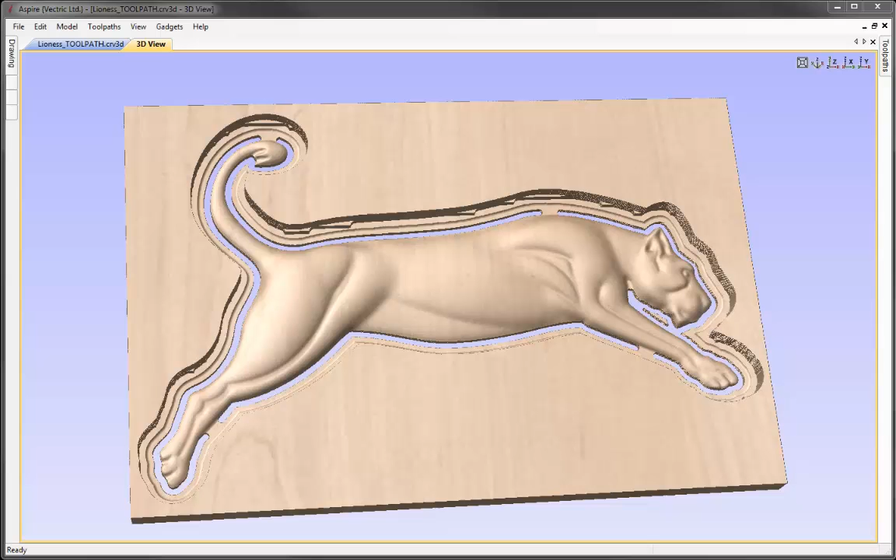Let's open a copy of the software. So let's click on the icon to open an existing file, and from the project folder I'm going to select the file lioness_model.crv3d and hit open. Now there we can see the 2D view. I'd like to see the 3D view as well, so I'm just going to click on the icon here to tile the windows so that the 2D view is on the left and the 3D view is on the right.

And before we go over and start calculating the toolpaths to machine this, I should check the size is the correct dimensions for the part that I actually want to cut. Let's come down and click on the modelling tab, and I'm going to select the component that we're going to cut here. And if we come up and click on the icon to set selected object size, then that's going to show me its width and height, and if I wanted to I could adjust these now. I'm happy with the values that we've got there, so I can hit close.

Next I want to check the height of the model in Z, so I can come up and click on the icon here to scale Z height of model. This is going to show me its current height here, and if I want I can adjust this either using the slider, a percentage value, or I can click on the button to set exact height. Now I'm planning to cut this out of a 1/2 inch block of material, so I want to make sure that it's somewhat smaller than that to allow a little bit of space above the model, and also to allow a little bit of stock on the back of the part as well to make sure it's thick enough.

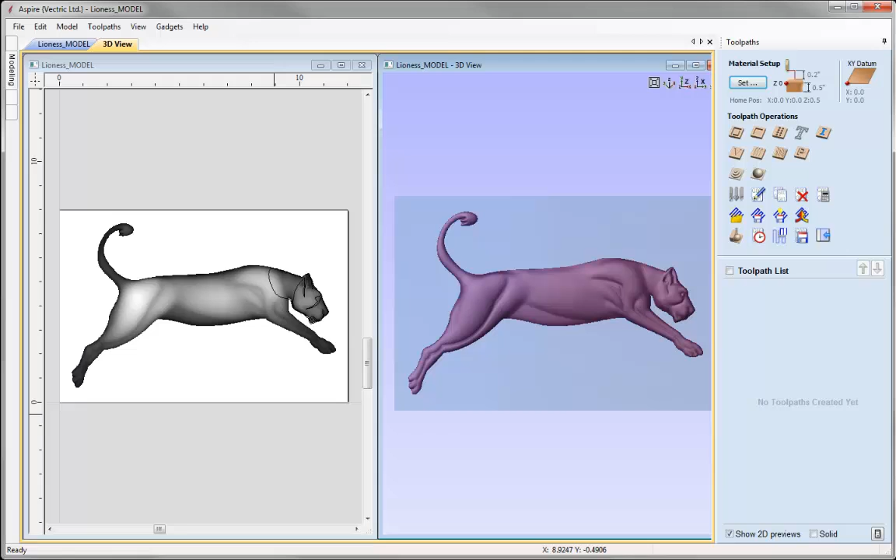Then we'll do what we call a raster roughing, which will take us much closer to the finished surface, and that will allow us to have much less loading on the finishing tool, and so hopefully run that a little bit quicker. It's not essential to do this 2-stage process, but it can be quite a useful technique for certain fairly low-relief sort of organic models like the one we've got here.

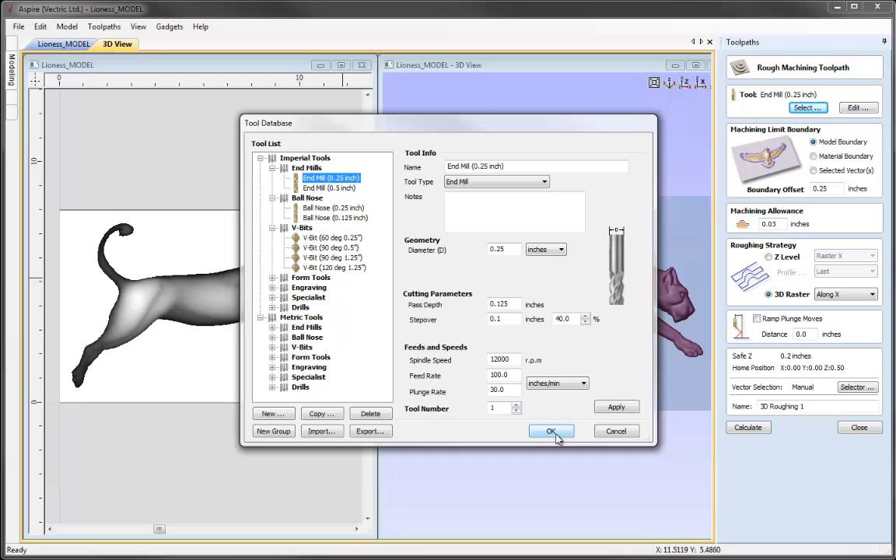So we'll come up and click on the icon for the 3D roughing toolpath, and in here I want to select a 1/4 inch end mill in this case, so we'll choose that tool there, 0.25 inch end mill. I'm just going to take the default settings for this and hit OK.

In this case we want to use the model boundary, so that's just going to pick up the visible model from the 3D view and use a boundary around that 3D object there, so I don't need to have any vector selected when I choose that option.

And I want to come past the edge of that boundary to make sure the tool clears material right the way down to the modelling plane, so that we've got a nice clean edge that we can come in and cut out around. So in this case we'll use quite a large boundary offset. We'll go 0.25 of an inch, so that means it's just going to extend the toolpath 1/4 of an inch past the edge of the model.

The machining allowance for the roughing allows us to add a sort of an imaginary 3D thickness on our model. What that's going to do is keep the roughing tool a little bit away from the finished surface. That ensures we've got some material to cut with the finishing tool, but also minimises the chance of the roughing tool creating some tear out or chipping our finished surface.

As I say, for the first roughing strategy I want to use Z-level roughing in this case, so that's effectively 2D machining around the 3D object. And I'm just going to come down and we'll call this toolpath 3D roughing Z-level and hit calculate.

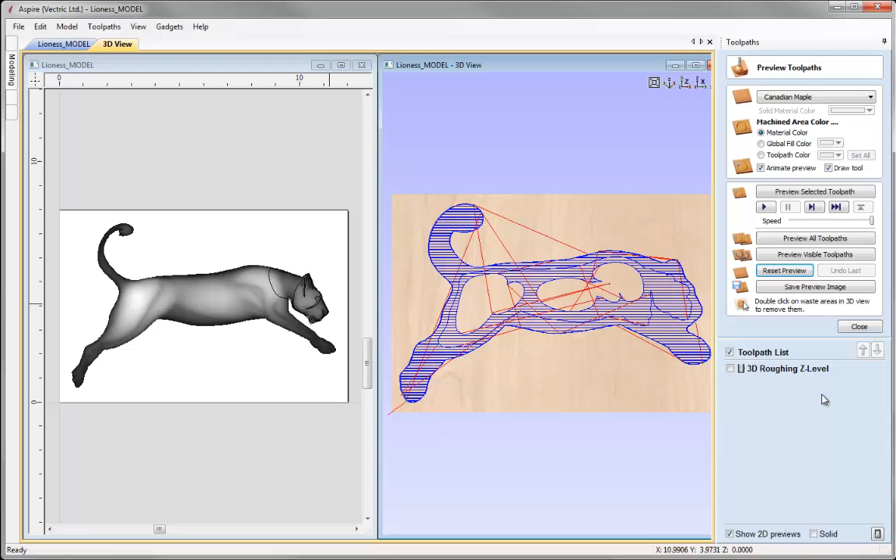Now we can see the software's automatically opened the preview toolpaths form here. We can just click and rotate this and you can see we've got a couple of two-dimensional toolpaths cutting around the 3D object there. So let's take a look at those in the preview. We'll click on preview selected toolpath. There's the tool just machining out around there. Maybe we'll just zoom in a little and you can see how that's cutting these 2D surfaces.

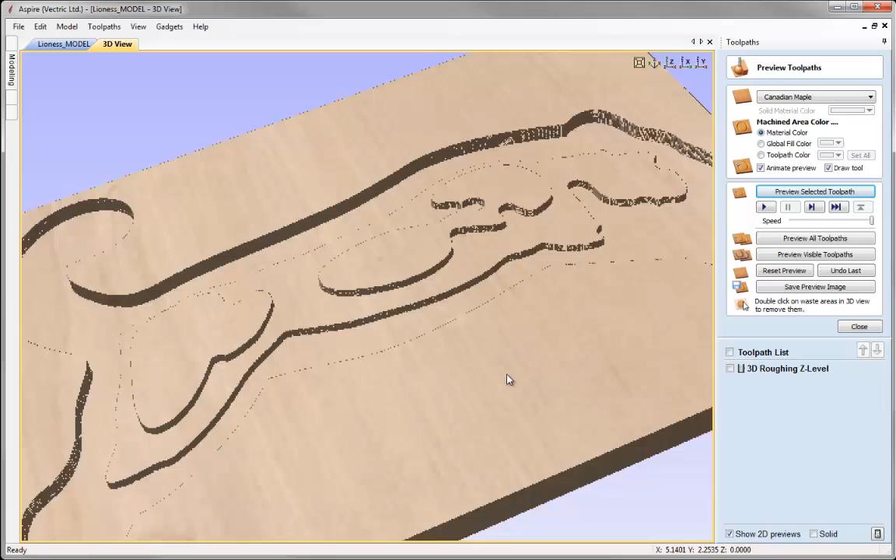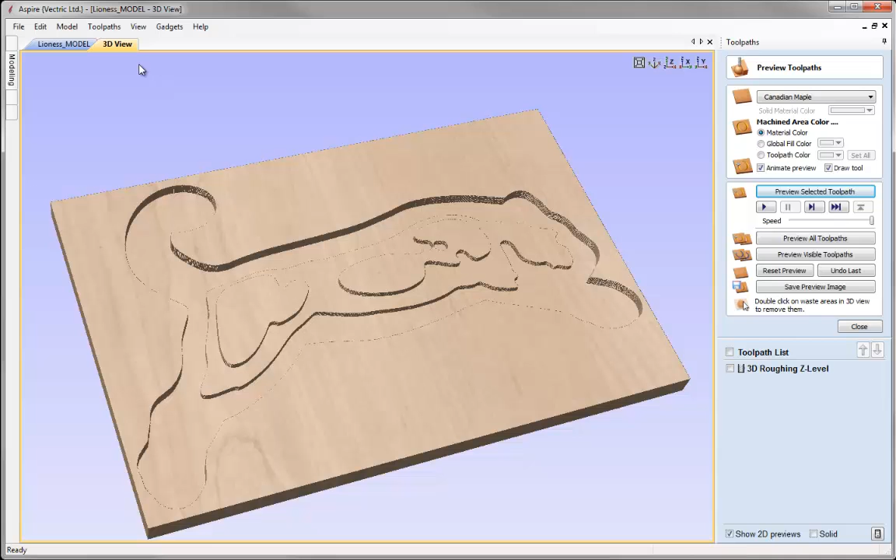Now in a lot of cases and for a lot of material that's fine and we could now proceed on to the finishing toolpath, but in some cases we'd like to get a little bit closer to the finished surface, and that's where it may benefit us to use a second roughing toolpath using the raster option. So let's just return this so that we've got the split screen. We'll go to View, Tile Windows Vertical again. Let's close the preview toolpaths form and let's go back up to the roughing toolpath again.

I'm going to use the same tool this time, but I do want to change the parameters a little. The way the raster works, it'll create a 3D toolpath over the part, but it will recut the same areas if the pass depth on the tool is shallower than the model. In this case, because we've already used the Z-level roughing to clear it out, I can do it effectively in a single pass. So if we click on edit here, for the purposes of this toolpath only, I'm going to override the pass depth of the tool. I'm going to set it much deeper than I would normally for a tool like this, and we'll set it to 1/2 inch and hit OK.

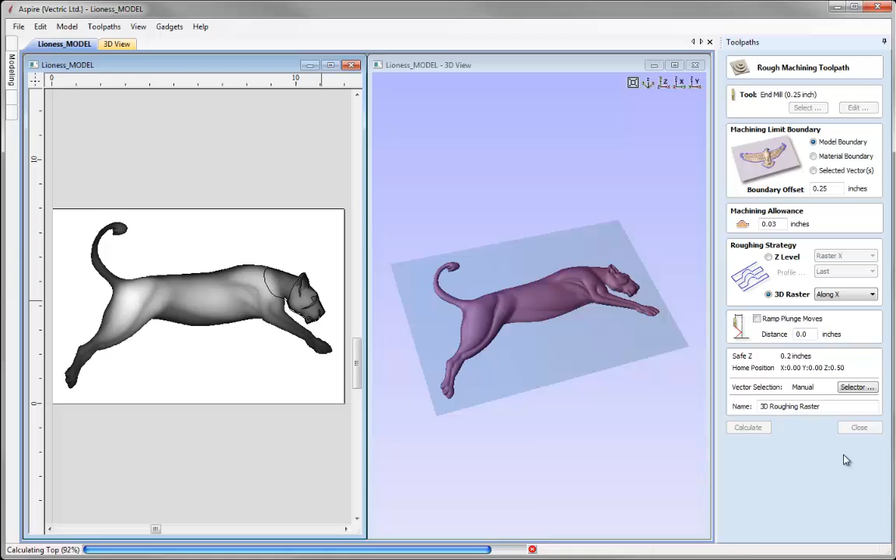I'm going to retain the model boundary setting and the allowance setting and just change this to 3D raster, and we'll change the name so we can differentiate that and call that 3D roughing raster and hit calculate. Now by entering that 1/2 inch pass depth in here, what I've allowed the software to do is cut over the surface of the model in a single pass, as you can see here, and that's fine because I'm going to have already cleared out the material using the Z-level roughing.

So with that selected, I'm going to preview the selected toolpath and you can see the effect that that's going to have on the finished part. So now we've really done a good job of clearing out the material over the 3D object.

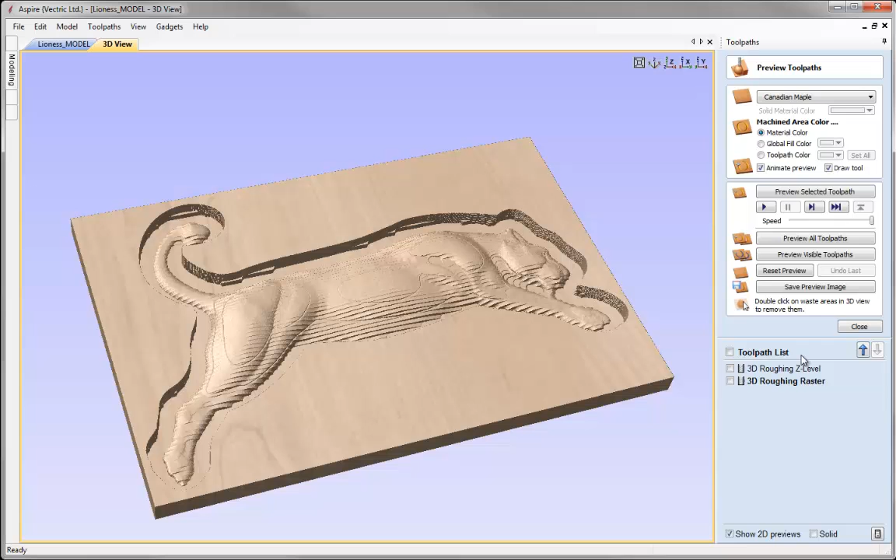Just hit close on the preview toolpath form and come up and click on the icon to create a 3D finishing toolpath. Now here I'm going to hit select, and from the tool database I'm going to choose a 1/8 inch ball nose tool. We can just adjust the settings if we want there. Very important when doing finishing is the step over. That's the distance between each pass. The smaller this value, the better finish I'm going to get on the job, but the longer the part will take to cut.

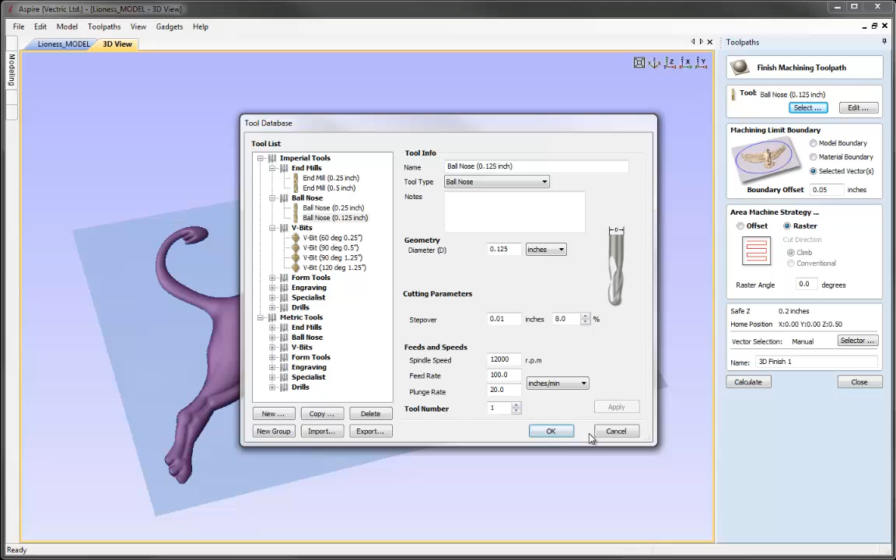Typically for a nice clean step over, you're going to go somewhere between 8 and 10% of the tool diameter. So let's set this down to 8% here. We'll hit apply and OK. We're going to use the model boundary again in this case, and this time for the finishing I don't need to come as far past the edge, so I'm just going to set a value 0.05 of an inch.

I'm going to raster over the job, raster angle 0, which means the passes will be parallel to the x-axis. I could change this, put in say 90 degrees if I wanted them to be parallel to the y-axis, or anything in between 0 and 360. In this case we'll just leave that at 0, we'll put in name of 3D finish and hit calculate. So there's our finishing toolpath.

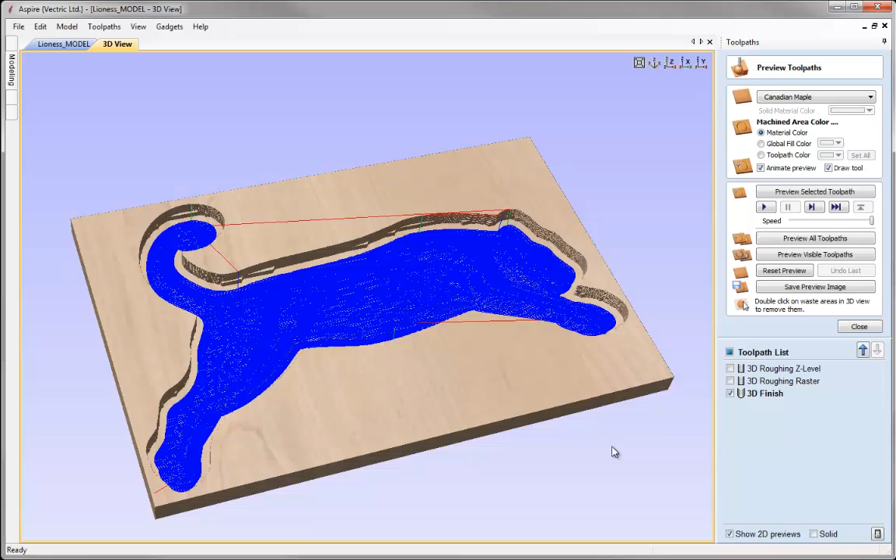Again, we can preview the selected toolpath, and the software is just going to run our 1/8 inch ball nose tool over the job there and show us exactly what the part will look like after we've run both our roughing passes and the finish. At this stage, it's important to take a look and make sure that this is giving you the detail that you'd expect. If it's not getting into the smaller areas of the job, then you may need to change to a smaller tool. Also, if you're getting a sort of rough looking surface finish, you may need to reduce the step over of the tool as well.

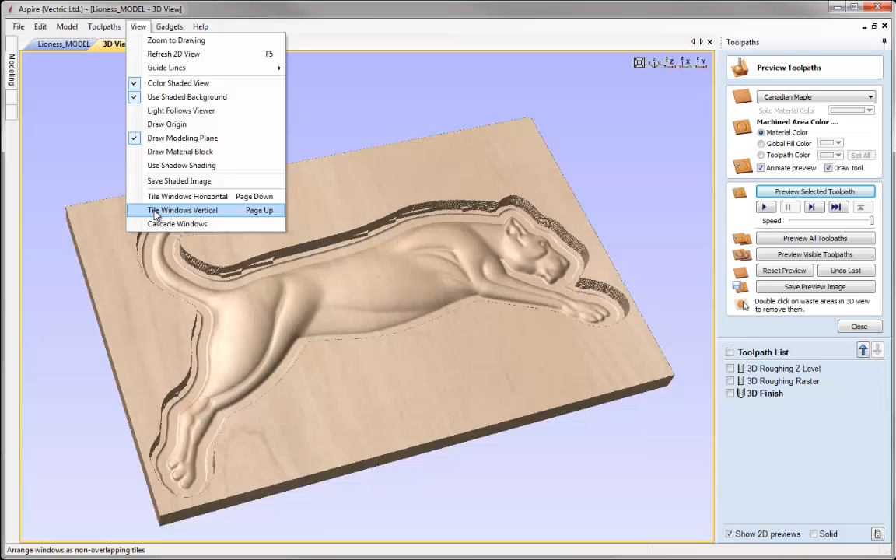At this stage, I'm pretty happy with the way that looks. I'm just going to go back up to View, Tile Windows Vertical so I can see the 2D and 3D view. We'll close the Preview Toolpaths form. The final thing I need to do is cut the part out. Now, to do a 2D toolpath like the cutout profile, I need to have a vector for the tool to follow. I don't have the option to select the model boundary. So we're going to need to come over to the 2D view and just make sure we've got a vector that represents the edge of our part.

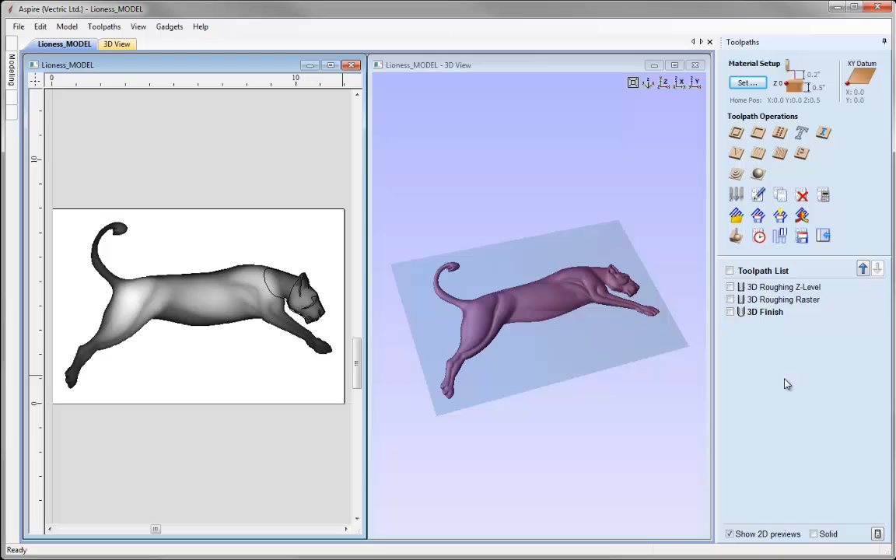Let's go ahead and just maximize the 2D view, and clicking in the 2D view there, I'm going to hit F to fit that to the screen, and then we'll click on the icon here to switch back to the drawing tab. Now if we come on to the layers, you can see that I've got a selection of layers from the original drawing of this part, and if I switch those on, I have actually got a variety of vectors in the background there. It's a little difficult to see because the grayscale for this layer is on the last layer in the list.

So what we may want to do is just select that grayscale there, right mouse click, move that to a new layer that I'll call grayscale, and we'll just make that invisible and inactive, so we remove that from our 2D view. And you can see there that there is a layer that's been created that I could switch on and off at any time. Now in this case though, what I would like to do is get a set of vectors that represent the outside edge of my part.

Now I can see I do have those, but it's made up of a number of separate vectors at this point in time. So what I'm going to do is just select those by holding down the Shift key on the keyboard and clicking the mouse to select the vectors that represent the outermost edge of my part. So there should be 5 of those there: the tail, the legs, body and head. I'm going to right mouse click, copy to layer, new layer, and we'll call that Cutout, and we'll make that visible and active and hit OK. So I've got a copy of those vectors on this new layer.

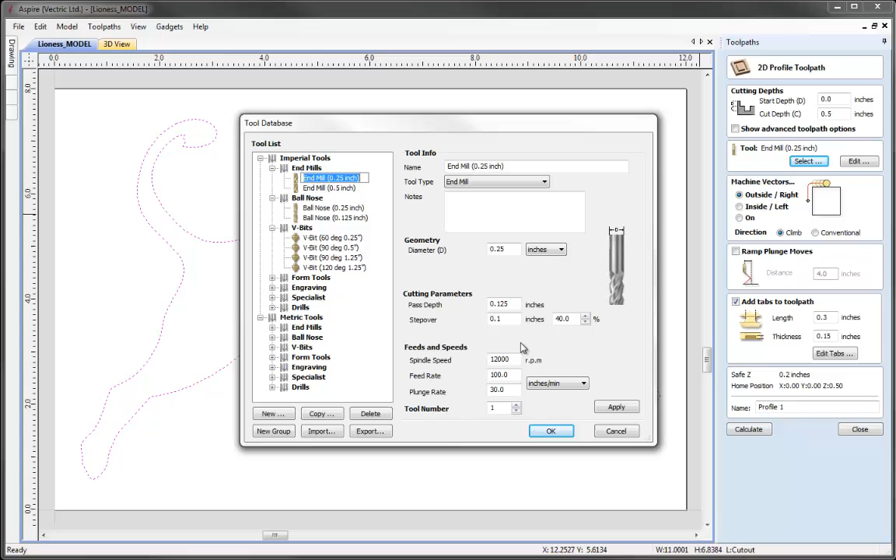I'm going to click on the Select button, choose a 1/4 inch end mill here, and go ahead and hit OK. And if I want to, I could hit Edit and just check the parameters for that.

In this case, maybe I'm going to go ahead and aim to cut this out in 2 passes. So we'll go with a pass depth of 0.25 of an inch and hit OK.

I'm going to cut outside the part here. I could ramp if I want to, but in this case I'm not going to worry about that. I do want to make sure this Add Tabs to Toolpath option is checked here.

For that, I'm going to set a tab length of 0.3 of an inch, thickness of 0.15, click on the Edit Tabs button. Now I could add the tabs by specifying numbers or values in here.

Or I can just come over to the 2D view while I'm in the Toolpaths Tabs form and click areas on the vector where I would like to add a tab to hold the part. So I'm going to do that at the end of the tail here because I think that may be a little weak. Do that on the leg here, and then on the back there, and hopefully that'll be enough.

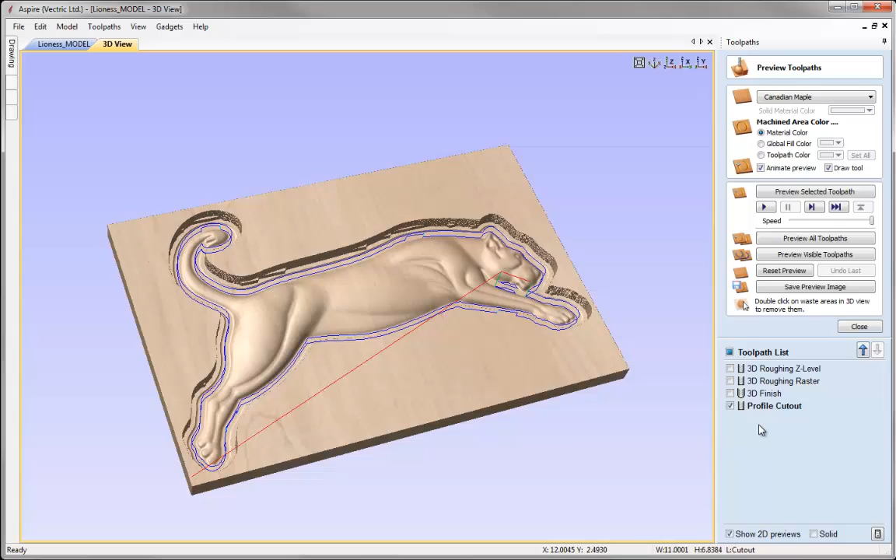Let's hit close, call this profile cutout, calculate, and there we can see how the part is going to be cut out using that particular tool.

Now I can already see that there's kind of an area here where that tool doesn't appear that it's going to be able to fit through. If we want, we can preview the selected toolpath and check that, and I can actually see that is the case. That tool is too large to fit between the chin and the leg.

So if I do want to cut that out using the tool, I will need to go to a smaller size tool to do that. In this case, let's click undo last so we can go back a step in the preview. Let's go ahead and close the preview, double click on the profile cutout, and let's hit select and change the tool.

Now at the moment I don't have a smaller tool than that specified, so I'm going to select the end mill here. I'm going to say copy, then select the top one in the list, and just edit the values in this so that it becomes a smaller tool.

Now in this case, let's go down maybe to a tool that's 1/8 of an inch in diameter, so I'm going to put in an end mill, name 0.125. Also very important to remember to change the actual diameter of the tool as well.

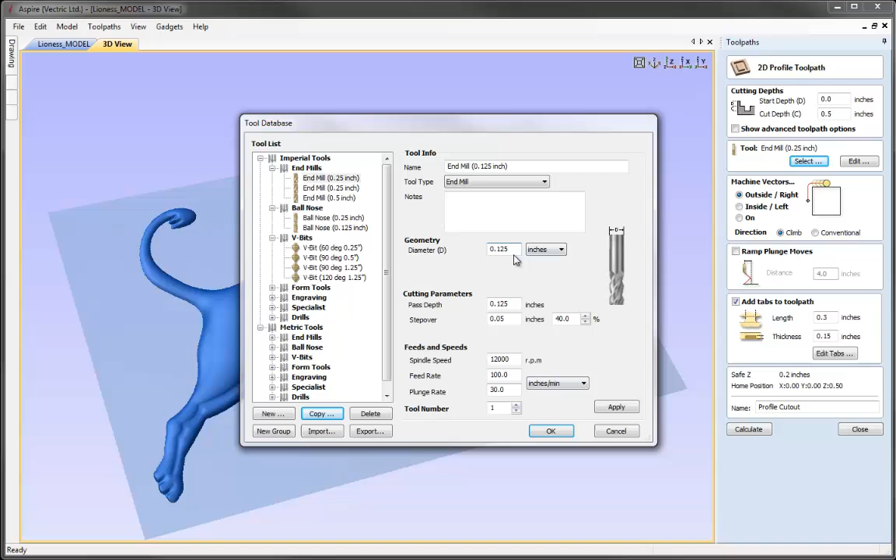The software will give you a warning if you forget to do that, but it's just good practice to check the name and the diameter match. If I'm happy with all the other settings, I can hit apply and OK, and with the same parameters there, I'm just going to go ahead and hit calculate.

Visually I can already see that the tool is able to get in and around there now, but if we click preview selected toolpath we can check that for sure.

I should be careful with the small piece of material there, that if I think that might cause damage as it's cut out, I may want to add a tab to hold that in place, or I may want to pocket that down first. In this case I think that'll probably be small enough not to cause a problem to my tool or to my dust collection system.

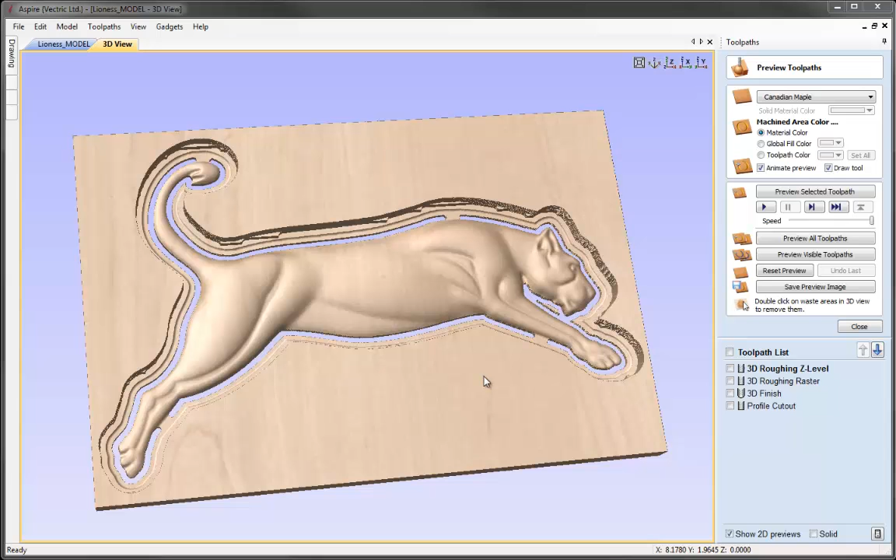If the preview at this point looks right, then I can go ahead and save these toolpaths, so we can close the preview toolpaths form.

In this case I have these two different roughing toolpaths I've calculated, but I would like to output them as a single file. To do that I would just check the two boxes next to those, click on the Save Toolpaths button, and then make sure the box at the top here that says Output all visible toolpaths to one file is checked, and there we can see those two toolpaths listed.

I can choose my appropriate post-processor for my machine from the list and click on the Save Toolpaths button, give that a name, and the software will save that as a single file that I can run on the machine.

Then to output the other toolpaths I would just select them from the list, uncheck the output visible toolpaths to one file, make sure I've got the correct toolpath in the list there, and again hit save, save my finishing and save my cutout toolpath. Let's go ahead and hit close.

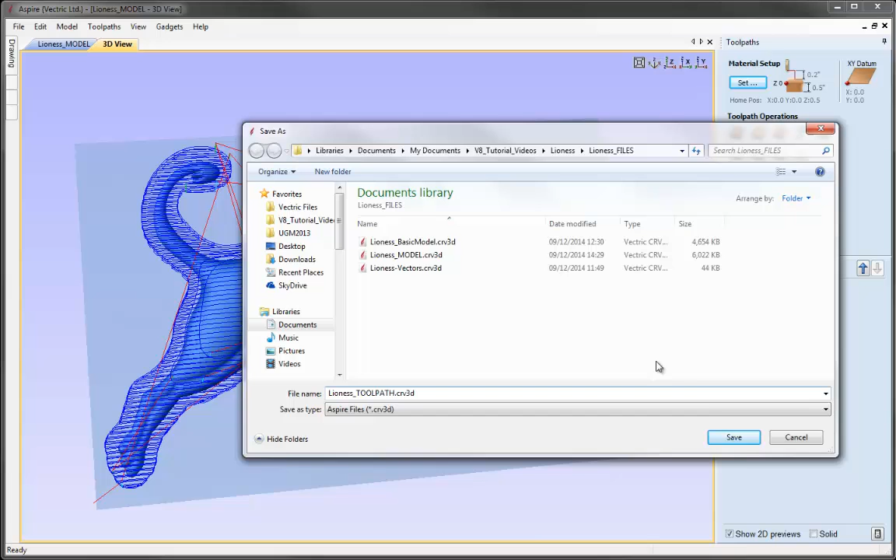So at this stage we can save the file here so that you can see a copy of this. Let's go up to File, Save As, and in the project folder I'm just going to save this file, call it Lioness Toolpath, and as I say, if you wanted to you could open that and see it in exactly the state we've created in the video. And at this stage that concludes this particular tutorial.